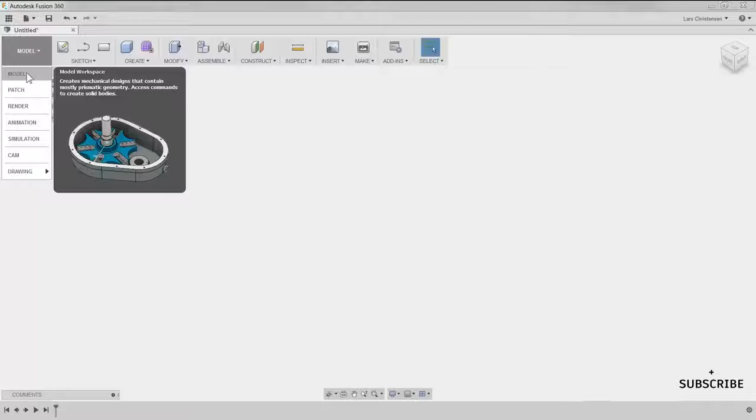So let's get going here. So the first thing you're going to make sure of is that we are in the model environment inside of Fusion 360. This is what we call parametric modeling. Second, we also want to make sure that our units are correct. Now you can change the units in the preferences up here in the drop down, so they always default to whatever you want. But you can also change it right here on the fly.

I think that's another important thing to know. And we're going to do this in millimeters. Click OK to that. And now we are in millimeters. So if we're looking at this conduit, we can say that it has 4 parts. There's the box, there's a lid, and then there are 2 screws.

Now, if you're coming from another CAD system, you might be used to creating each component and then merging them together later in an assembly file. We actually don't have to do that inside of Fusion 360. We can do it all in one file. It is good practice, though, if you are going to do that, to decide that up front. So we're going to create a component that's going to be the box, and a component that's going to be the lid.

And then we're just going to bring in the screws from the McMaster catalog that resides right inside of Fusion 360. Now, before we start drawing anything, we're going to create those components here in the tree, by just going up, right-clicking, and saying New Component. As soon as we do that, we get a component here, and the top component actually shows us an assembly icon.

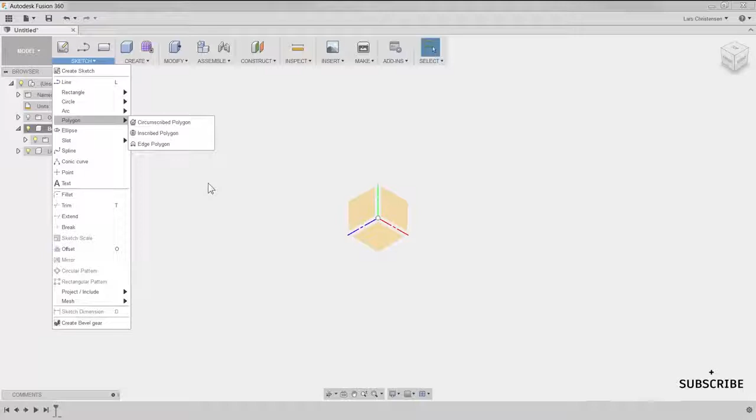Now you could go up and use the menus up here at the top, and there's a bunch of drop down menus here, but I really don't like hunting for these, and I don't think it makes any sense for you as a new user to start in the drop downs and then later on learn other things. You might as well just learn the quickest way to start with.

That is to go over here on the plane and right click, and I can create the first sketch. So I'm going to click on that. When I do that, the plane automatically goes normal to where we are sketching. That's why you saw everything spinning. And you will get this menu over here that shows our sketching constraints. We're going to talk about these in a second.

You will also see that we are starting down here in the bottom to capture the history. One of the powers, as you're going to see as we model up this little box, is that we have this history.

Now, going back up to the menu, if I hit the drop down, you will see that we have different sketching tools in here to help us. We have different types of rectangles, different types of circles and so forth. But like I said before, I really don't like to have to hunt in here. There's actually an easier way.

If you scroll down to the description area, you will see the list of shortcuts that I'm going to be using in this video. You can write them down on a piece of paper and put them next to your monitor. Honestly, I don't think it makes sense to learn the software by hunting around in all the drop downs and then later switching over to the shortcuts. There is really just a handful you need to learn, and I will make sure they pop up every time I'm using them.

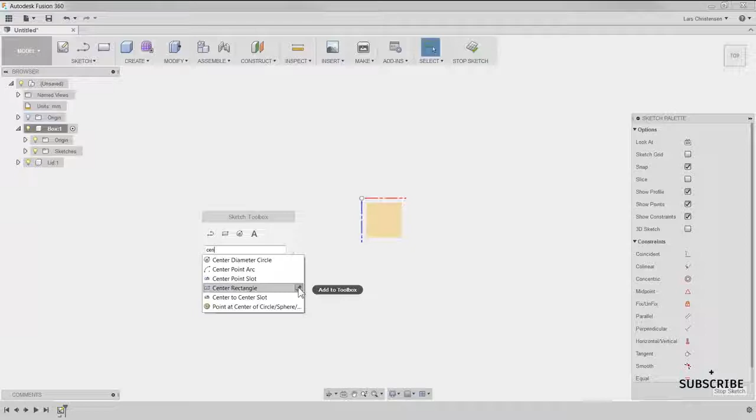If I click right here, I will activate the center rectangle. But you can also hit the little arrow over to the right and pin it to that S menu. So I'm going to do that for this one. Click that. Now you will see that it is part of this menu. Again, I got this menu by hitting S on the keyboard, and it pops up wherever your cursor is. Really handy. So I'm going to go ahead and hit the center rectangle.

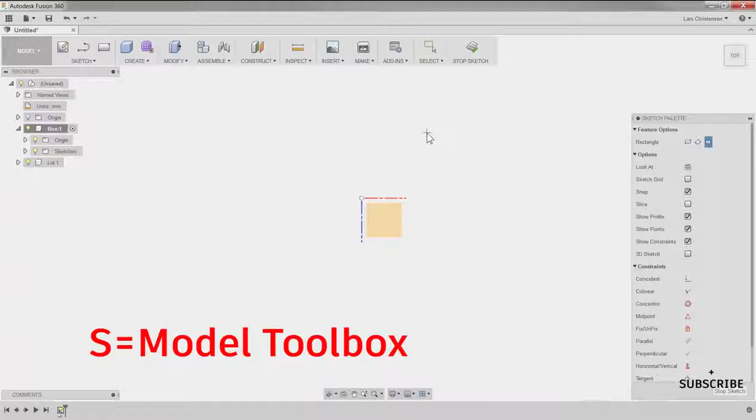Like I said before, it's extremely important that your first sketch is tied down to the origin. It's kind of like that nail in space. So I'm going to hover over the origin and click once, and you will see this center rectangle appear. The dimensions are appearing on each side of this box, which is great, and one of them is light blue. That means I can start typing in that dimension right now.

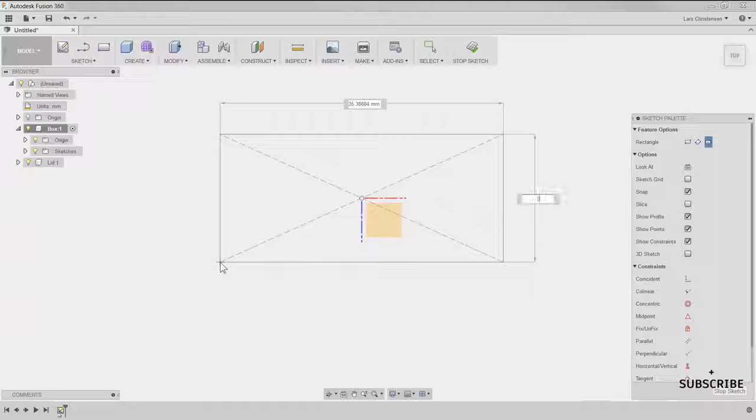So that dimension is going to be 34. So I'm going to type that in. Now to jump to the length of this box, I'm going to hit the tab key on my keyboard. That's going to take me right over to that one. And the length of this one is 83. And now I'm going to hit enter. And you will now see that I have the box displayed with my 83 and my 34.

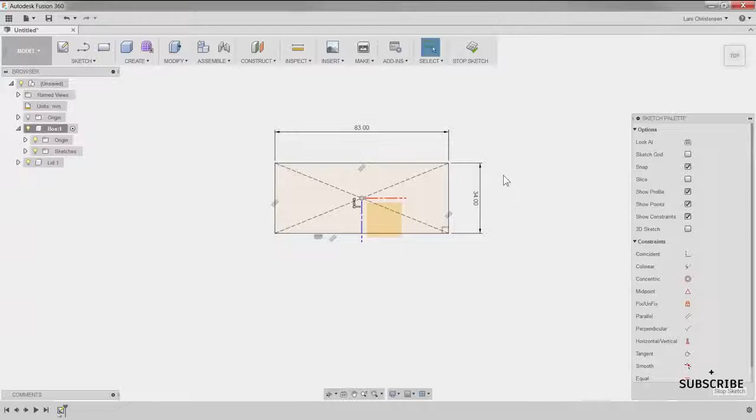And then you will also see that there are some other symbols showing up around my sketch here. They are called relationships. And you will actually see these relationships are all listed over here to my right in my menu. Now, relationships are rules for our 2D sketches. So think about that our sketches can all move around in that plane they are placed on, and the relations will kind of tie them down. So think of it as rules.

Now, the way to work with this is that whenever you sketch something up within Fusion 360, first we apply relationships such as verticals, if we're going to make something perpendicular, and then we're going to add dimensions afterwards. You will see me using relationships all through the video. And it's important to remember that the main goal for this is to turn our sketches from blue to black, which is going to turn them from movable to all tied down and locked down.

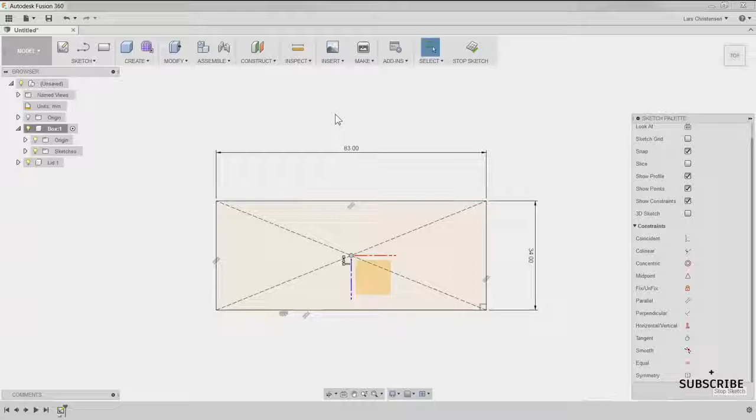So with this, I am ready to take this 2D sketch and extrude it into space. Now again, these menus up here have all the commands that you want to use, but I think you're better off, right out of the gate, starting to remember some of these shortcut keys so you don't have to learn these later on as you're using the software. To extrude into space, I am going to use the E on your keyboard. So I'm going to click that one,

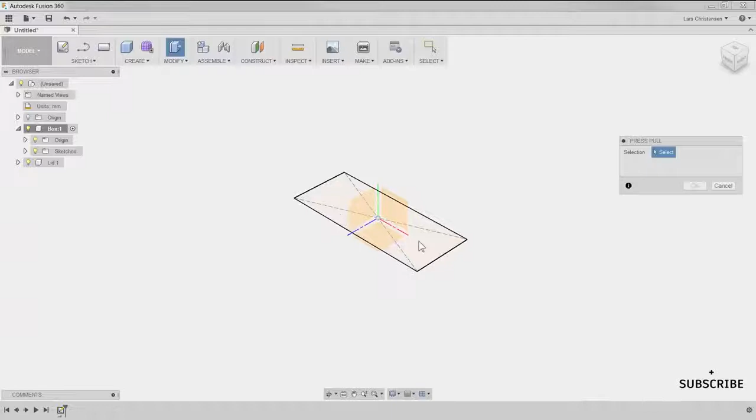like that. And you will see that now I jumped out of that sketch menu and I'm now in something called press pull. Now I'm going to select what I want to extrude into 3D space, and that's this rectangle here. And then I get a little arrow, and now I can actually start dragging my part into this 3D space. Now I'm going to make this part here 38 tall. So I'm going to type in 38 in that little box there and hit enter. There we have it. We have now created our first true solid on this part here.

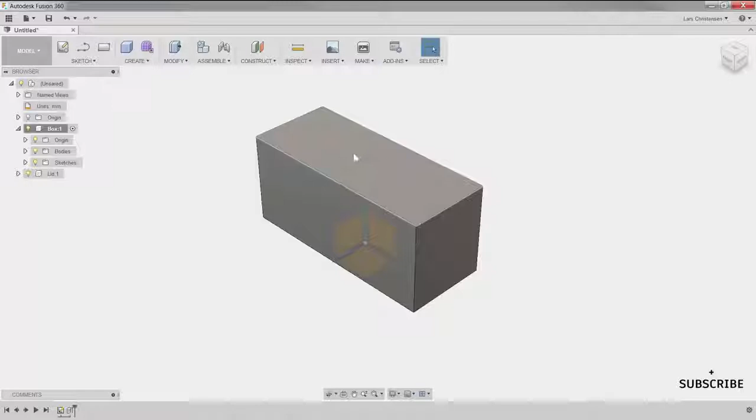Now I said before that when we sketch within Fusion 360, we either sketch on a face or a plane. Now the first sketch we put in was on a plane. Now we can actually sketch on faces because we have some. So what we're going to do now is we're going to carve out the center portion of this box. So I am going to right click on that face because I can now start a sketch on that and say create a new sketch. You see it goes normal to. I'm going to zoom in by rolling the mouse wheel here.

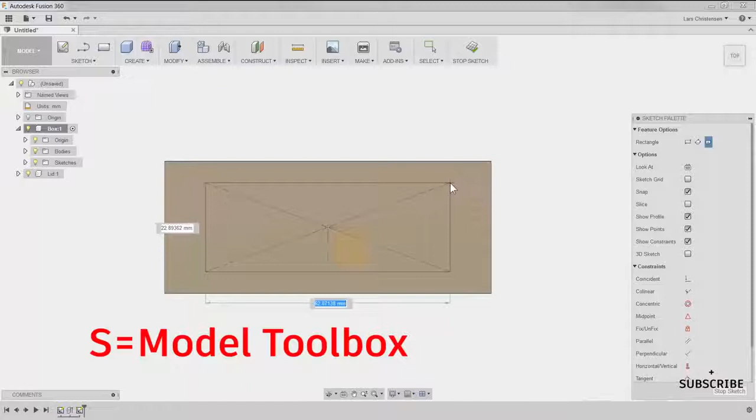And I could go ahead and hit the S key and select another center rectangle. And I could go ahead and find the origin again like we did before and sketch another rectangle like this. But my drawing specifies not the size of the rectangle, but the size of the wall. So I'd rather use that, and I really like to be lazy when it comes to CAD and CAM. So I'm going to offset the outer edges the 4 millimeters that is required for that wall.

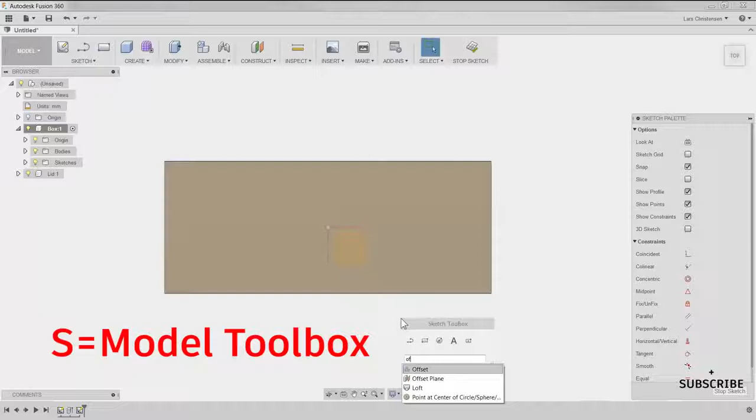So what I'm going to do is I'm going to hit my S key, and then I'm actually going to offset. So I can start typing in offset. And as soon as I hit the OF, you will actually see that the offset command shows up right here. So I'm just going to click on that. And when I've done that, you will see that menu appears here. I'm just going to click on the edge. And as I do that, I get an indication that I now can offset that edge.

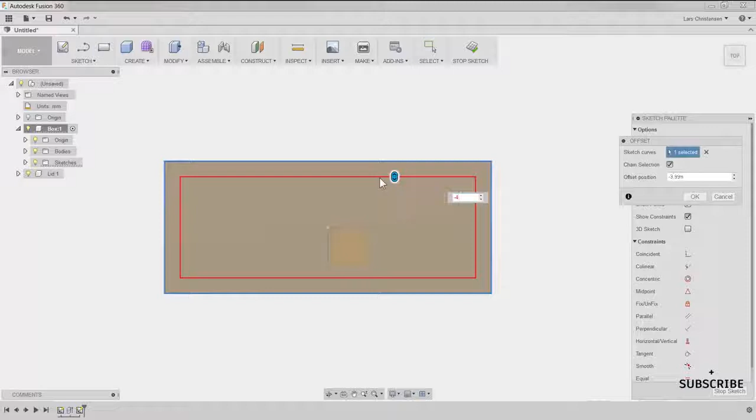Okay, if I go on the outside here, it's a plus command. If I go on the inside, it is a minus command. So we're looking for minus 4 millimeters. I'm going to hit enter. And now I have a 4 millimeter wall created all the way around. You will see the sketch is black, so we can go ahead and extrude that or cut that, and we're going to again use the press pull.

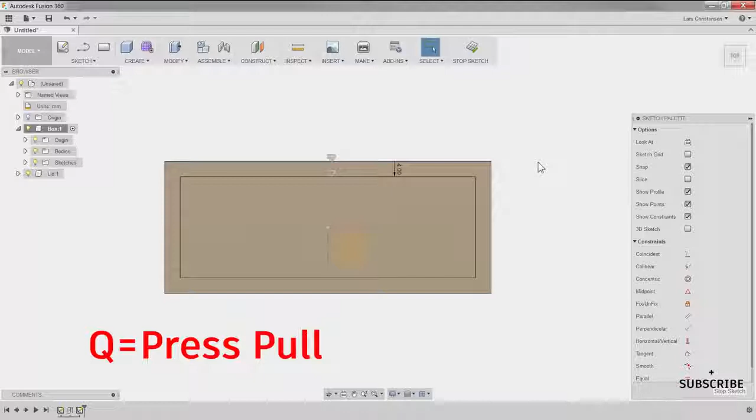So the press pull is used both to extrude and subtract. So I'm going to click on that. And now I'm just going to select that bottom, or that inside here, and you'll see if I pull up, it adds material, but if I pull down, then it would actually cut it away. Pretty smart.

Now, I'm not really sure what the depth is on this pocket. I know that it's 4 millimeters all the way around. And if I look at my drawing, I should actually say the box is 38 tall minus 4. Well, that's a lot of math. And I want to show you one of the real cool things about parametric modeling.

Because I know that I want it to be 4 millimeters on the bottom of the box, like the sides, I can actually go over here to the menu for this extrude or cutting command, and you will see down here I have something called distance. So that is that distance. You will see that that distance here will change as I'm pulling this little arrow here.

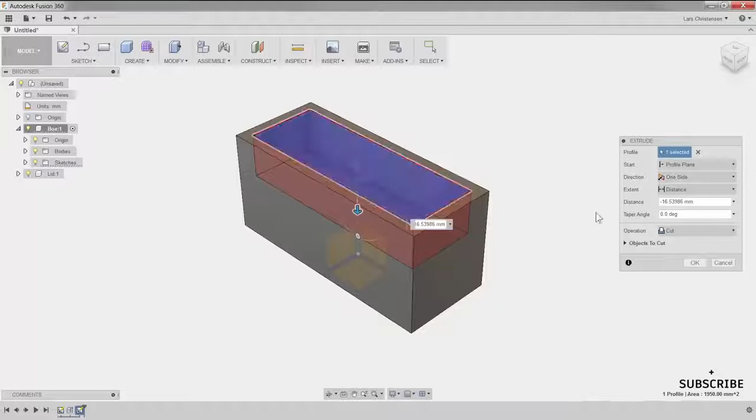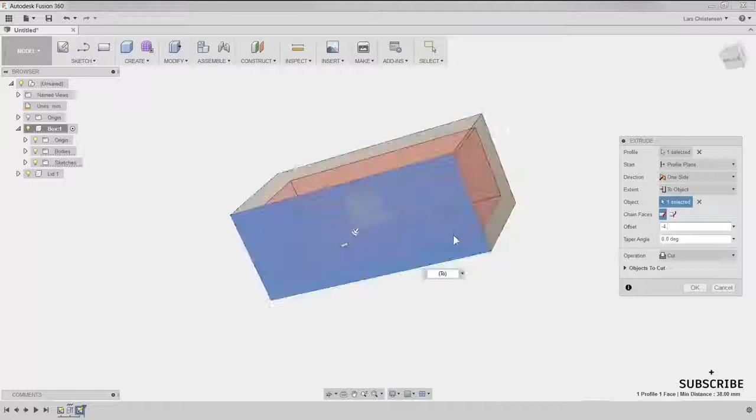And I could do the math, but I would rather change this drop down to an object. And then if I scroll over and I click the bottom face, I actually have an offset. And I can go in here and create that minus 4 millimeter right here. So that means that the cut is going to go from the top to the bottom minus 4. So that's actually kind of like doing the math for me.

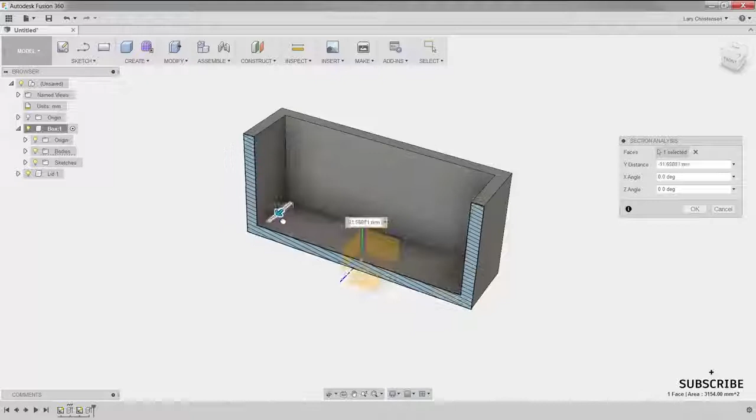Let's hit OK to that. And now you will see that we have this here. Now let me just do a section view for you. So if I go over to inspect and say section analysis, if I click on this face here, you'll see I can do a little section view. What this means is that it will always keep this to be 4 millimeters, even if we decided to make the box taller. So this is really one of the powers of parametric modeling.

By using objects, select the bottom and offset by 4, we are assuring that there will always be 4 millimeters on the bottom, just like we did the offset on the side. This means that if we ever have a design change where we're going to make the box taller, we don't have to worry about that 4 millimeter. That will always be on the bottom. If we had just done a subtraction from the top down, if you made the box taller, then we'll get more material in the bottom. So this is one of the things that makes parametric modeling very powerful, that we can set these rules.

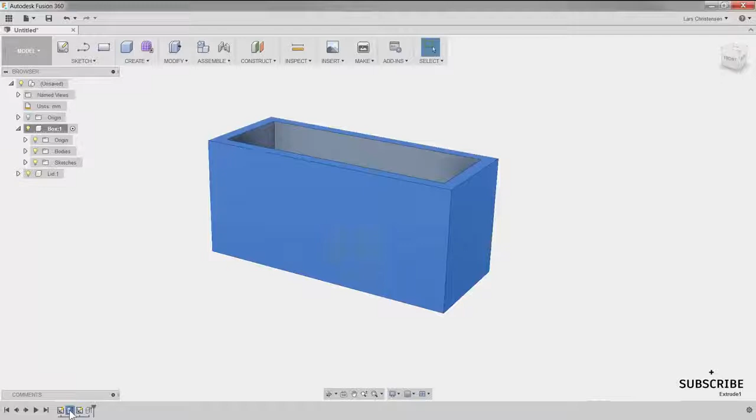And the other thing you will see is that we are keeping on growing this little history line down here. So here was our first sketch. Then we extruded that to the box. Then we created the sketch on top, and then we cut that down. And again, if I go in here to edit that feature, I just right click and hit edit. We did it to an object, and we selected that bottom face and created a 4 millimeter offset from the bottom. Okay, so this is really powerful to know some of these functions in here.

Now at this point, I am going to add a couple of fillets to the part. And again, I'm going to hit the S key. And you will now see the S key looks a little different because we are not inside of a sketch. So now we actually get some other tools. And the first one here is the fillet. So I'm going to go ahead and select that.

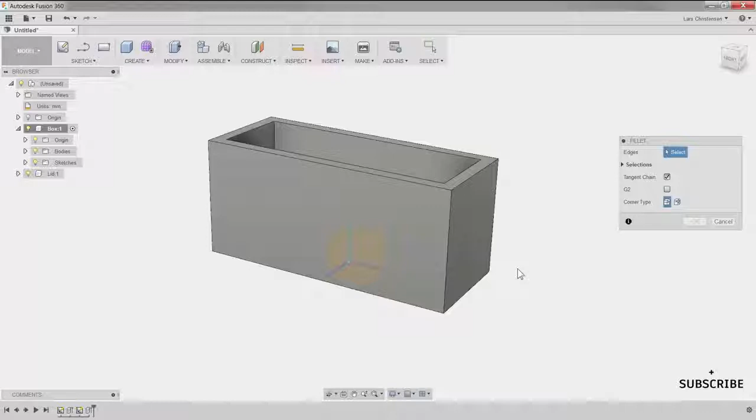And I'm going to start with the inner fillets of the box. So I'm just going to hover over here, and I can actually select right through geometry. It's smart enough to know that I'm probably aiming for these inside corners just by hovering over here. And I'm going to make these 3 millimeters. Hit OK. And you will see that now we have the fillet down in the corner.

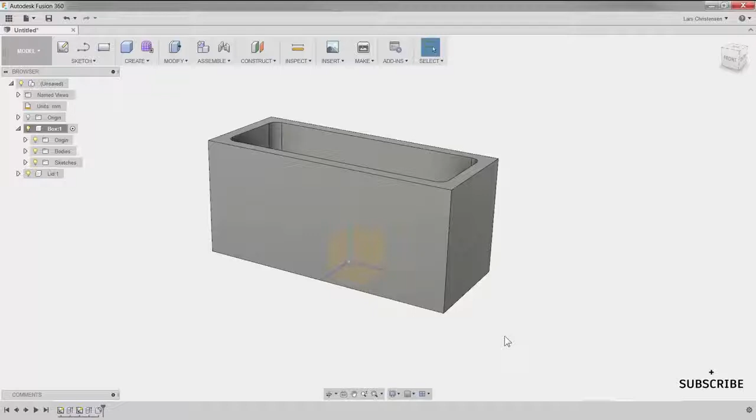Now I'm going to create another fillet on the outside. So I'm just going to hit the S key again and go. And again, remember that you could hunt these down up in the area down here. The fillet is also down here. You could also just hit F. That's another shortcut. But S, hit the fillet.

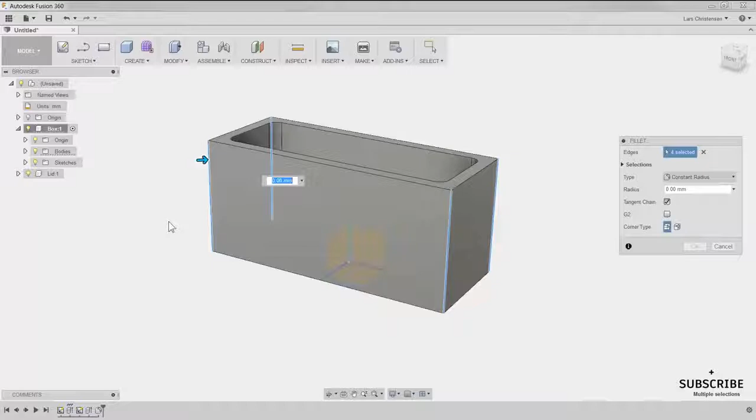And I'm going to select the outside here. Make sure I get the back side. I could, of course, just turn the part around. And I'm going to make the outside here. I'm going to make these 6.

All right, so just a quick recap. If you're modeling something up like an assembly, go ahead and make the components first before you start sketching. Always sketch on either a face or a plane. That's the rule. And make sure that you take the time to fully define those sketches. I know you're in a big rush. I know you want to get things done, but it's very, very good practice.